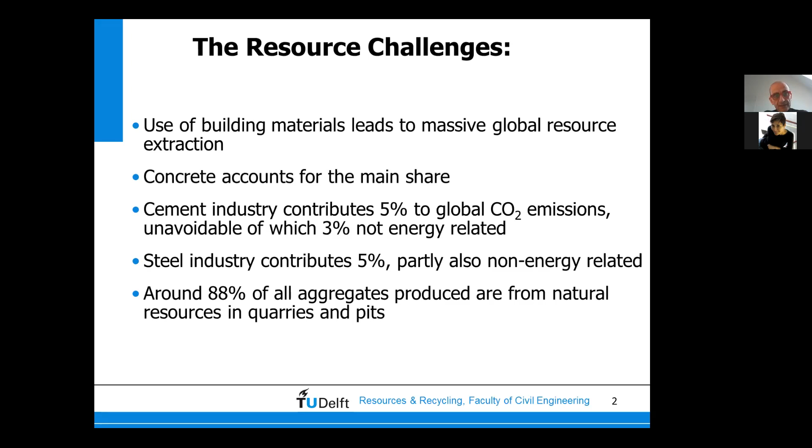Construction demolition waste is increasing exponentially because buildings are reaching the end of life, then are being demolished, and we have a lot of materials which we need to deal with in one way or another.

Land filling is not an option anymore. In many countries it's simply not an option, and as mentioned below, if all the demolition waste produced in Europe were landfilled, it would occupy an area of 75% of Dutch land. Even though the Netherlands is not a huge country, 75% is quite a lot.

Another motivation is that the European Commission set a very ambitious target on the recycling of construction material. By 2020, 70% by weight should be recycled, and indeed it is being done.

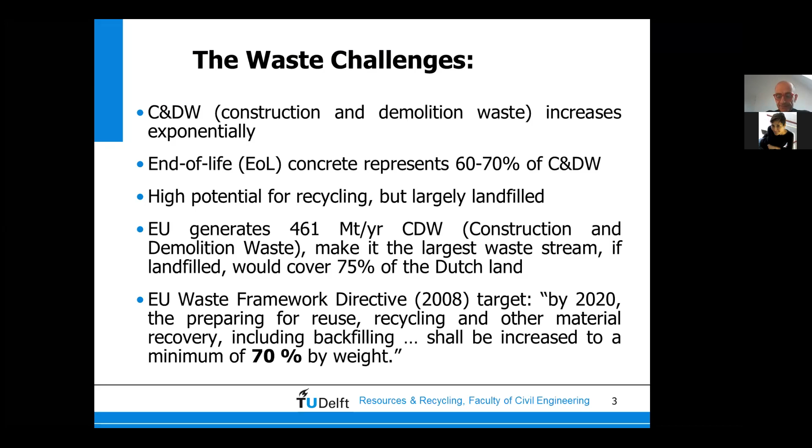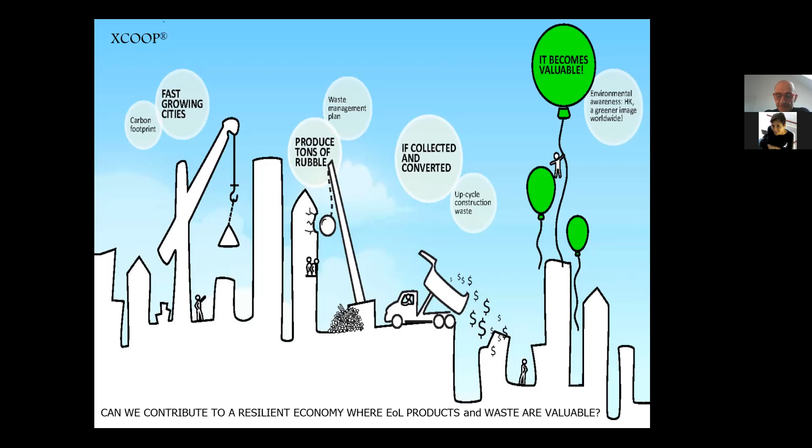Now these slides, made by Cristina, help me show you that in the city there is a lot of material which can be valorized and used to make new buildings instead of downcycling or even worse, landfilling. So it is possible to replace the current linear take-make-dispose industrial model with a more profitable and environmentally friendly circular economy one.

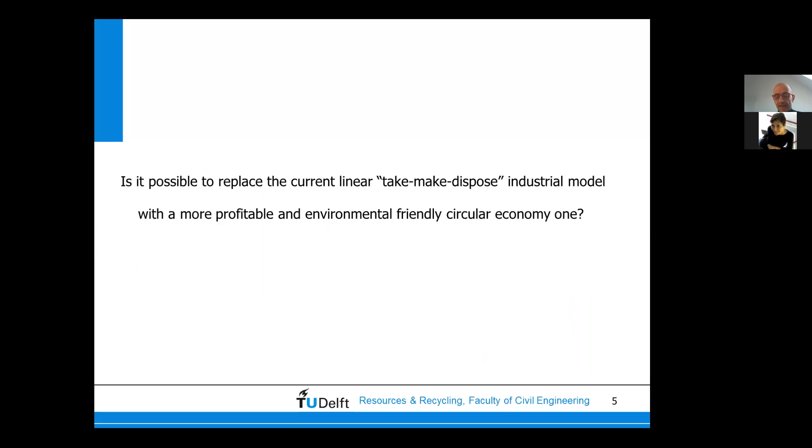The answer to this question, in my opinion, is yes, it is possible, and there are ways to do that. To help explain this in more detail, I will focus on an example.

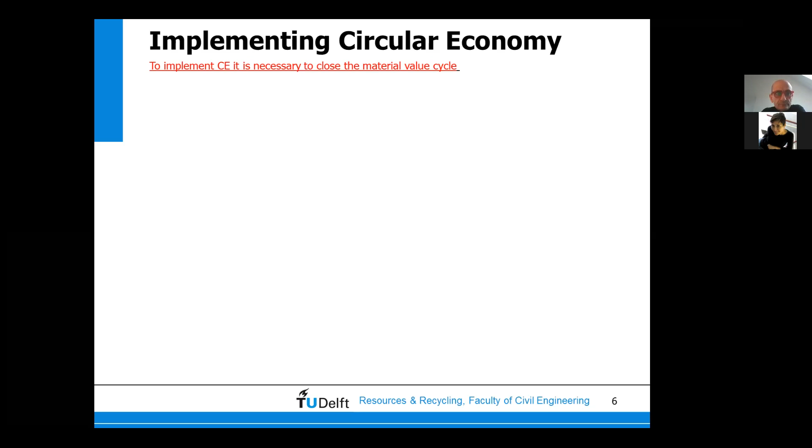I would like you to focus on a cubic meter of material moving in the truck that is delivering the concrete. This cubic meter contains a value of about 90 euro. By the way, one cubic meter of concrete is about 2.5 tons of material.

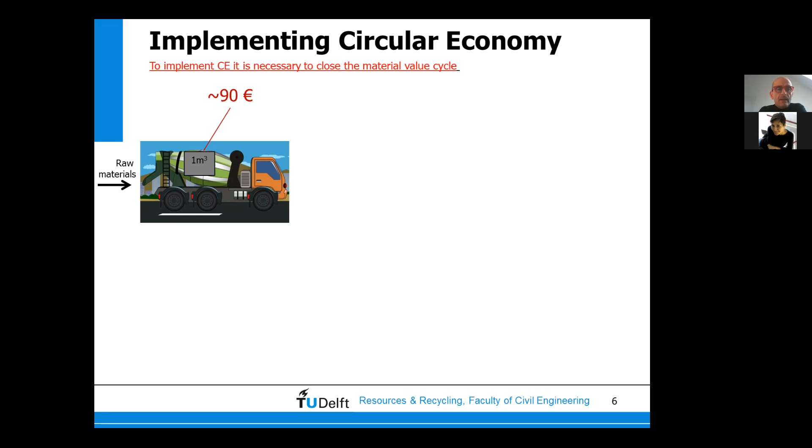So this cubic meter of material, when it is embedded in the building, we can assume it is still worth 90 euro, even though the value would actually be higher because it is part of the building. But let's keep it at 90 euro.

When the building is demolished, what is the value of this material, of this cubic meter? Normally it is between 12 and 15 euro, because it contains not only the crushed concrete but also pollutants like bricks, glass, gypsum, and so on.

Sometimes it even contains asbestos, and in this case the value is very much negative, not even 12 or 15, but much more negative, because asbestos is a very dangerous material.

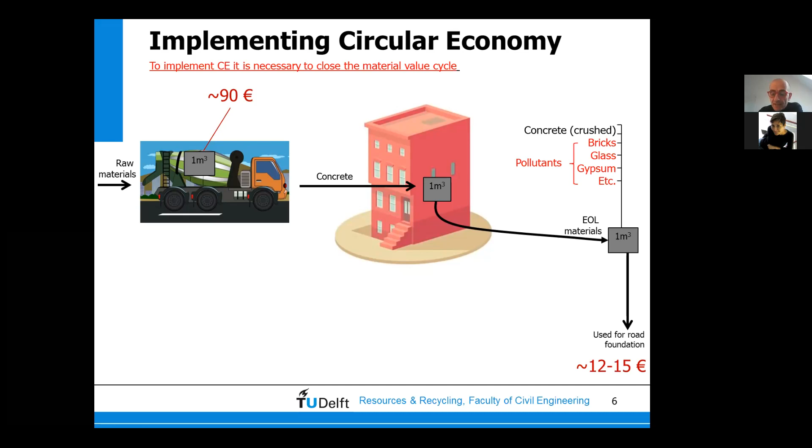Even though the value goes from 90 down to 12 or 15 euro, this material is still recycled because it's used most of the time as road-base material to make new roads. But as you can see, even graphically, this is not a circular process, because you go from material worth 90 euro to material worth 12-15 euro. This means you still need to dig and produce new aggregates to make new concrete. So it is not circular.

What do you need to do to make it circular? You need technologies, for sure - the technology to separate the bricks, glass, and gypsum from the crushed concrete and make it pure concrete again. Technology is definitely a must, but it is not enough at all.

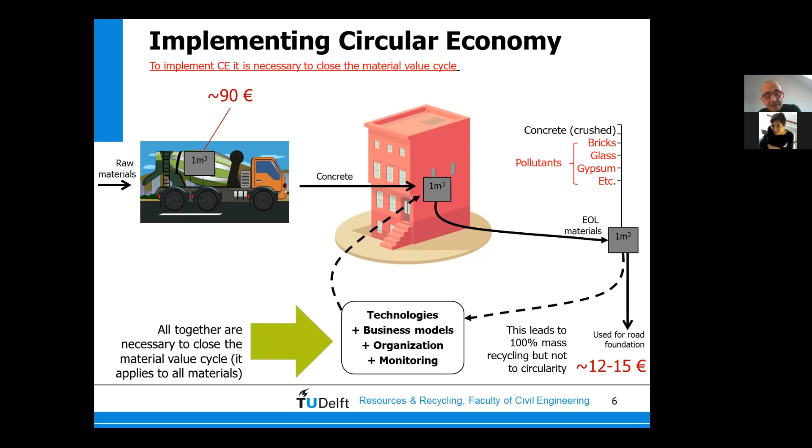You also need new business models, organization, and monitoring - we will get to this. All of these are key points to make that cubic meter of material, worth 12-15 euro when crushed, go back to 90 euro.

So the technology must be cheap, because the value anyway is not very high - you cannot spend 50 euro to get material worth 20 euro per ton, or even less. So it must be cheap, and if the process must be cheap, it means the technologies must be very clever.

There should be no residues, because again landfilling is not an option - otherwise it would make the whole economic process negative and it would not be implemented by industry. And the quality of the materials has to be good, because constructors are not going to jeopardize their project by using materials that can affect the structure of their building, for which they are responsible, putting their company into trouble.

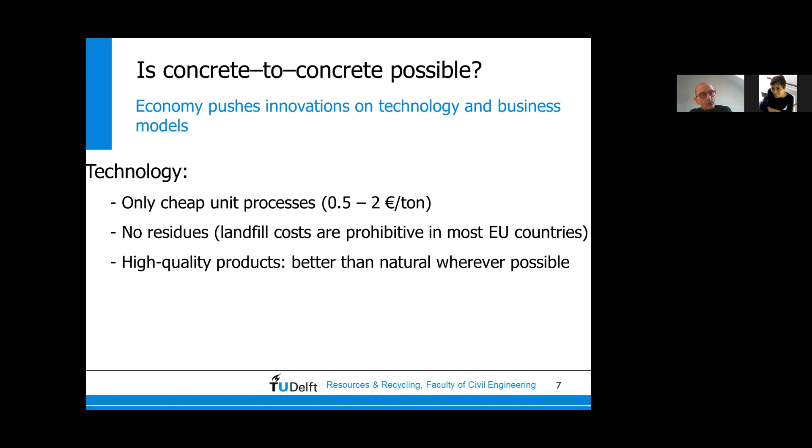So the quality must be high in order to make a high quality product.

Business model is also very important, because again the target here is to reduce cost and increase trust. One solution is to avoid and minimize transfer of ownership, to avoid materials going from one actor to another, with each actor wanting to gain profit, because eventually the full process is not economically profitable.

Then we need to avoid transport for economic reasons but also for environmental reasons. And then we need to create transparency about quality. People must know what they are buying, because if they are not clear about what they are buying, they don't buy it. And if they don't buy it, there is no demand, and if there is no demand, the value of recycled materials is almost zero. And then again, you don't close the loop.

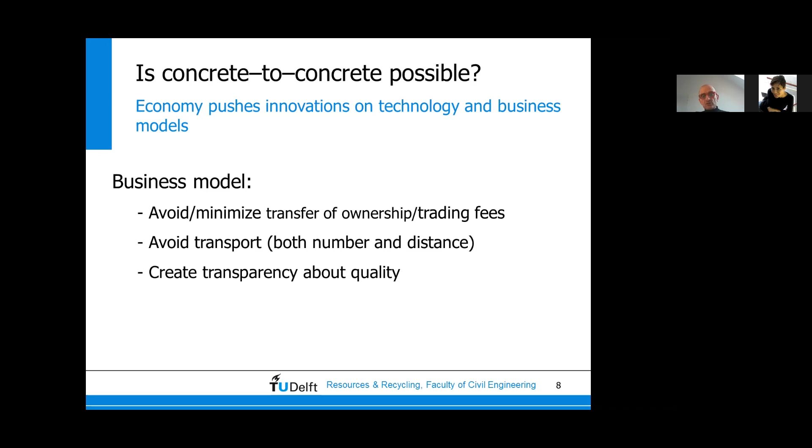And then we don't need to dig new raw materials, virgin materials, to build new buildings, construction, infrastructure, and so on. So this is in a nutshell what we are doing, what we have been doing, and what we will do in the future to make this happen.

From the end-of-life buildings, we go to smart dismantling, which means we deconstruct the building in a smart way. I will show you later how it is done. Then we have selective demolition to get only the concrete, as clean as possible. This clean concrete is then crushed in a crusher. Normally this is nothing special, it's a state-of-the-art technology.

And then, if necessary, we have sensor-based sorting to remove big pollutants from the crushed concrete. Then we go to ADR, which stands for Advanced Dry Recovery, a patented technology developed in our group, the group of Resources and Recycling, which can produce clean aggregate 4-16 millimeter aggregate, very clean and usable to make new concrete, but also 0-4 millimeter sand, which goes to another technology, also patented by our group, which produces minerals and recycled sand, clean sand.

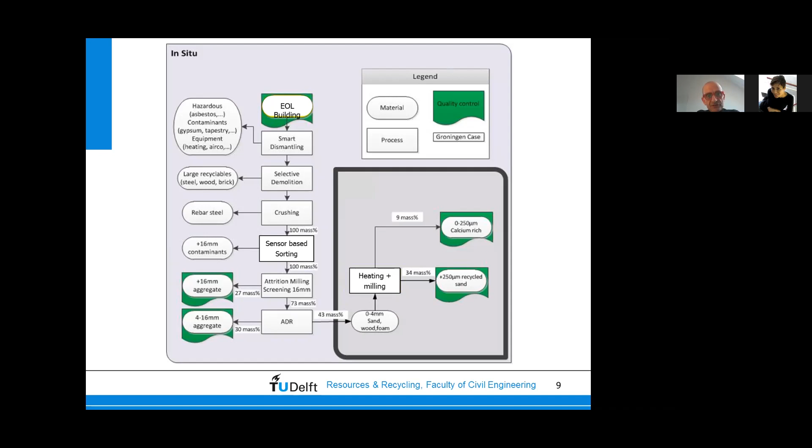So now I will show you some pictures, because pictures are much better than such a graph. And here you can see how to do the smart demolition, or selective demolition, it's the same. This was actually a project done in Groningen a few years ago, but we have been doing this also later on. I like this photo, that's why I'm using it.

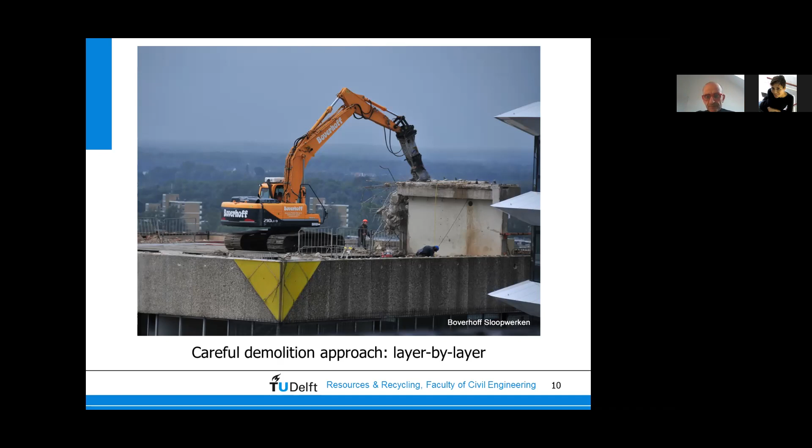Then you get all the concrete from the building. It was a tower of 40 stories. For the Netherlands, for Europe, it's a high building. Probably for the US it's not that tall, but still here it's tall.

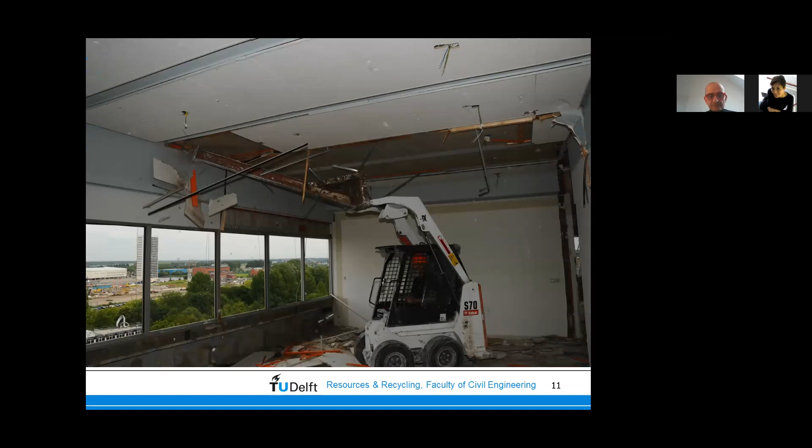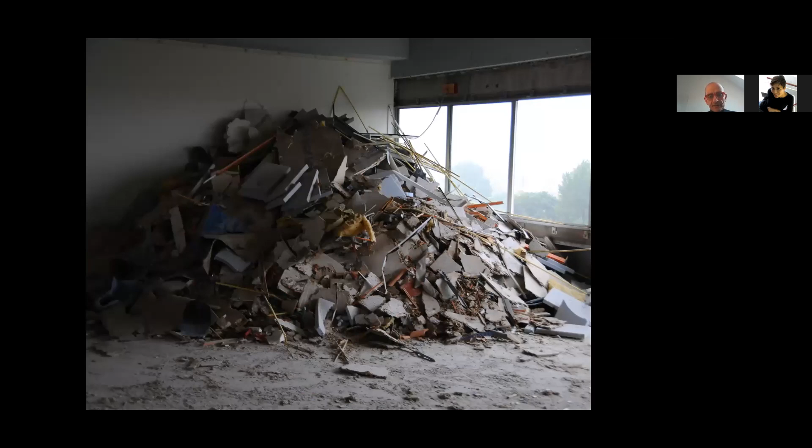And then you see a bobcat inside the building to remove the gypsum, the metals, the carpet, the steel. You also see a guy dismantling the hydronics of the building to separate valuable materials like copper and so on. And also you get valuable materials, but also eventually clean concrete to be crushed. And here you see the carpet being collected and selectively placed in different containers.

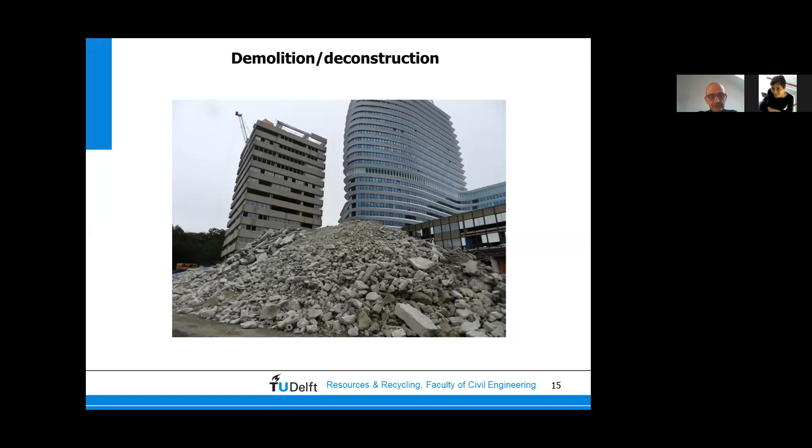So then we go from the building you see on the left to the building you see on the right. And the material to use is the heap you see in the front of this picture. This is exactly the crushed concrete we use as input for our technology, which we call C2CA technology, which stands for Concrete to Cement and Aggregates.

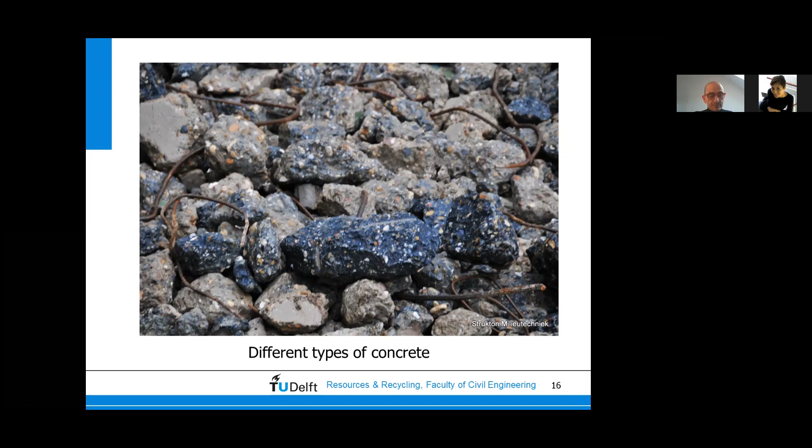I'm also proud to mention that we set up a spin-off company of the Technical University Delft, named exactly C2CA Technology. And this technology has been getting quite some interest from international organizations, because they found it to be a very important, useful technology to make construction circular.

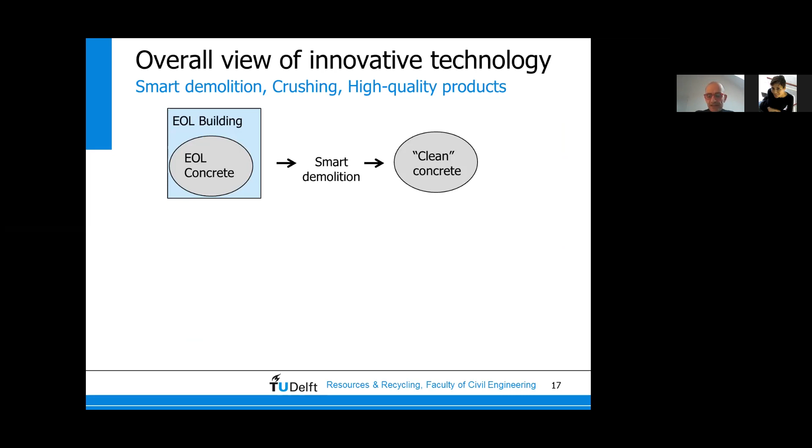So then we go from the end-of-life building, concentrating on the end-of-life concrete. With the smart demolition, we get clean concrete. From the clean concrete, with the crushing, we get the contaminants, the steel rebar, and the crushed mineral. Then by using the C2CA technology, we obtain aggregate measuring bigger than 16 millimeters, the 4-16 aggregate, the 0-4 sand, and the cement paste. And this is used to make new concrete, and then we make it circular.

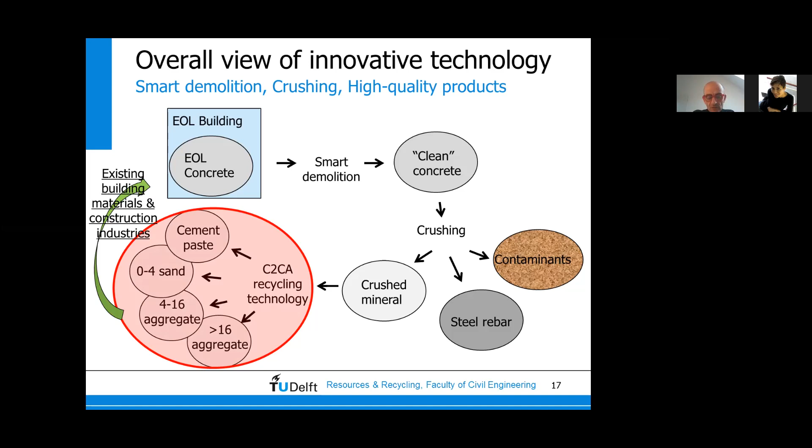This is the working principle of the advanced dry recovery technology. Here you see the input: it is crushed 0-16 millimeter crushed concrete, which comes from the crushing of end-of-life concrete. It is sieved, and we get the 0-16 millimeter fraction, which is fed into the ADR.

The ADR is basically an advanced sieving machine with the very interesting capability of sieving materials which are wet. Since during a demolition project you always spray water to reduce dust, and also because in the Netherlands it rains quite often, you anyway get wet material. You cannot sieve wet materials with a conventional sieve because the sieve gets clogged and stops working.

The ADR makes a very fast jet, creating a jet of materials. It accelerates the materials at about 3000 G. By doing this, with cleverly placed compartments, the machine separates the heavy particles from the small particles. It's basically like when you go to the sea, get a handful of sand, and throw it against the wind - you see that the heaviest particles fall farther than the fine particles.

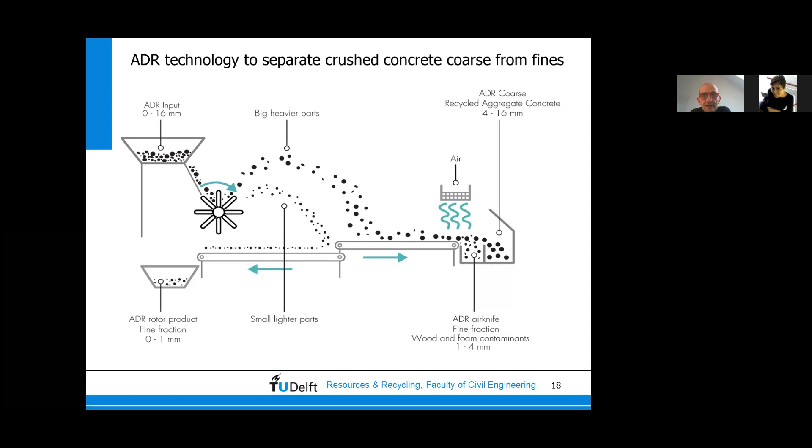Now I would like to show that this technology is not just theoretical, but is really implemented at industrial scale. We even made it movable, because we wanted the possibility, whenever possible, to bring the recycling facility to the demolition site instead of bringing the materials to the recycling site. The ADR is movable.

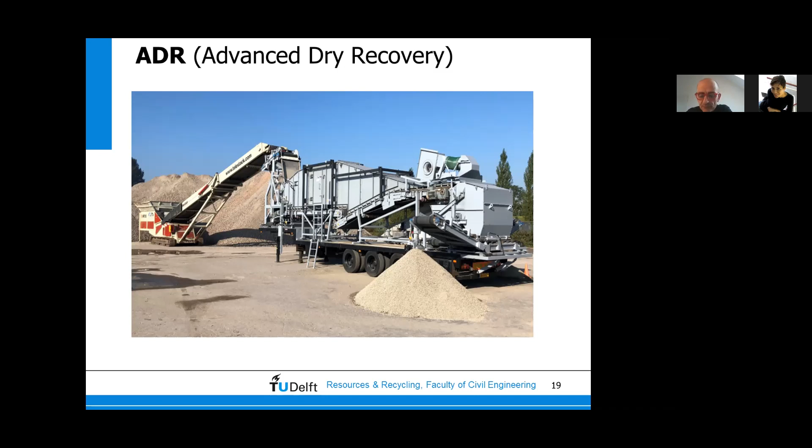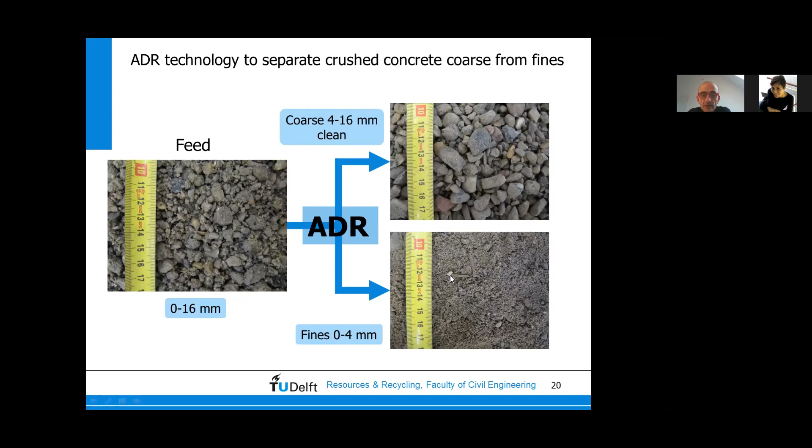So this is still the ADR. Now I will show you the heating air classification system used to treat the 0-4 millimeter fraction. This is the working principle of this machine - it is a kind of fluidized bed reactor, but not exactly, it's similar.

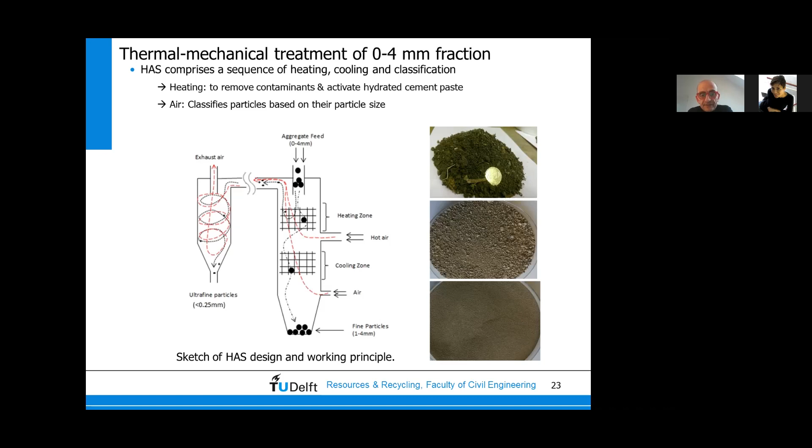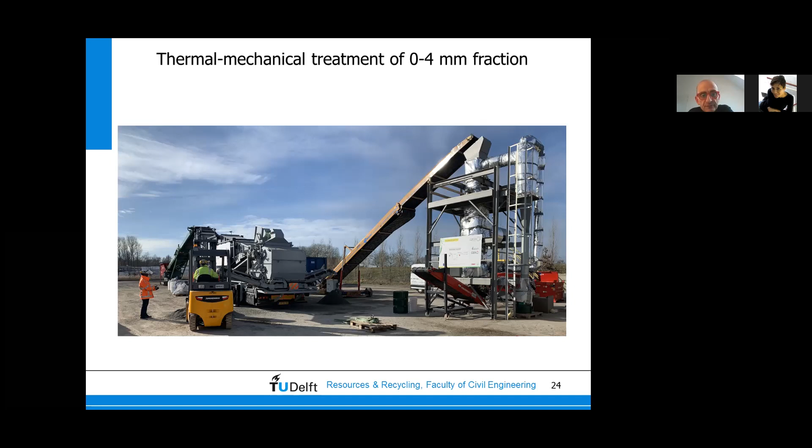This HAS machine is also movable. This picture shows one demonstration we have done - actually we are doing many of these. Here you see the ADR and the HAS working together, processing materials.

But there are also other uses. I cannot go into too much detail because my time is limited - otherwise Cristina gets nervous with me.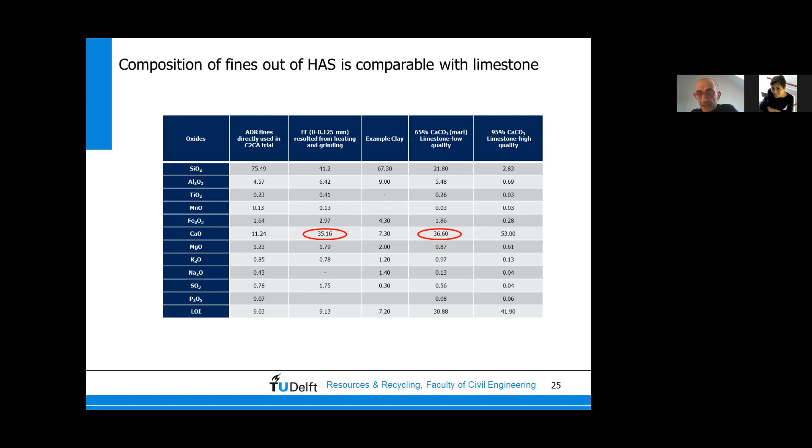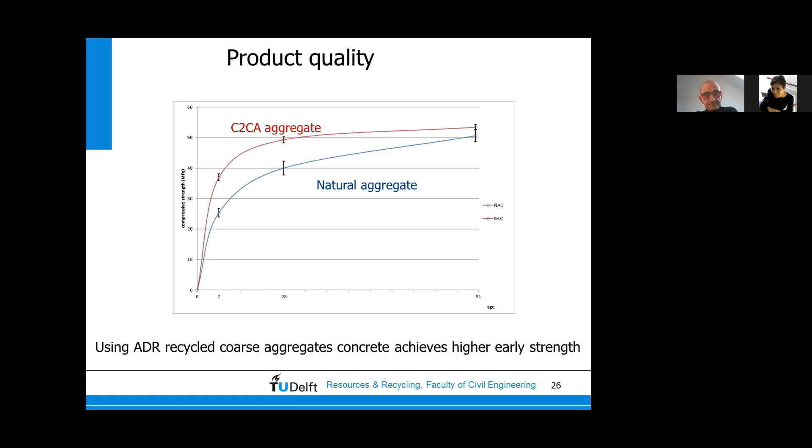Another important aspect I mentioned before is monitoring, and this is a very important aspect we are focusing on right now, because we want to make people confident of the materials they are buying. To do this, we need to assess the quality of the materials, not by sending the material to the lab, because then you have to wait days to get the analysis back, and this is not possible.

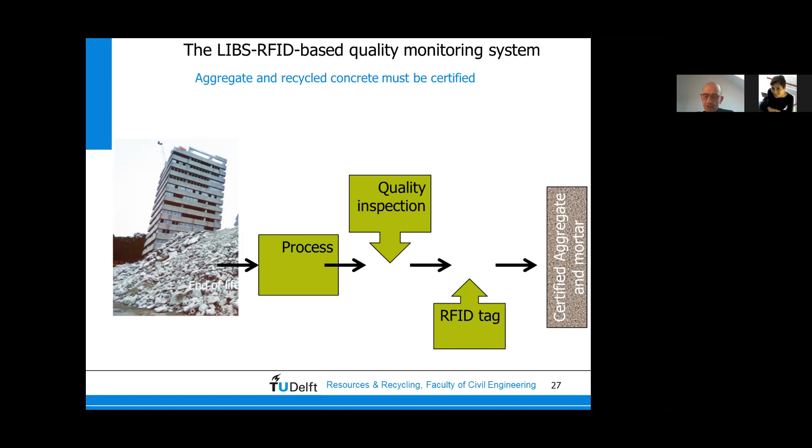We need to have an assessment of the quality of the materials right away, in the moment we are processing the material. To do this, we are using laser-induced breakdown spectroscopy along with RFID tags, which will make all the steps in the value chain more clear. This is the LIBS. How does the LIBS system work?

The laser produces a plasma when it hits the materials, and when the plasma cools down, you get the spectral response of the materials. I mean, when the laser produces a flame, and the flame then cools, it emits photons which are collected by the spectrometer. By the analysis of the spectra, we can get an idea of the composition and the pollutants, if any, moving on the conveyor belt.

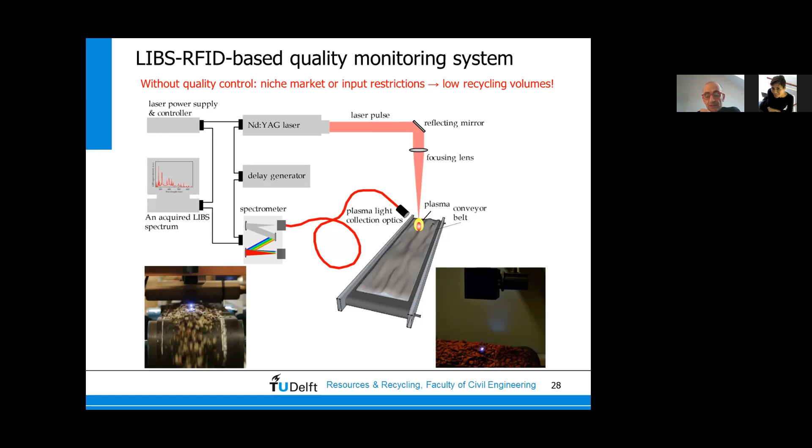Now we are transferring this information into a tracer, an RFID tracer, and conveying this information into the materials going to the market. Then the material is not only of high quality, but the quality is assessed by the LIBS, and this information is transferred through the RFID to the customer, who will be able to check whether the material they bought is the one they were waiting for.

This is a very important step, because it will reduce, in my opinion, the main bottleneck which prevents the use of recycled materials, which is the lack of trust. In this way, we can increase the trust, and then we are confident that this will make a difference.

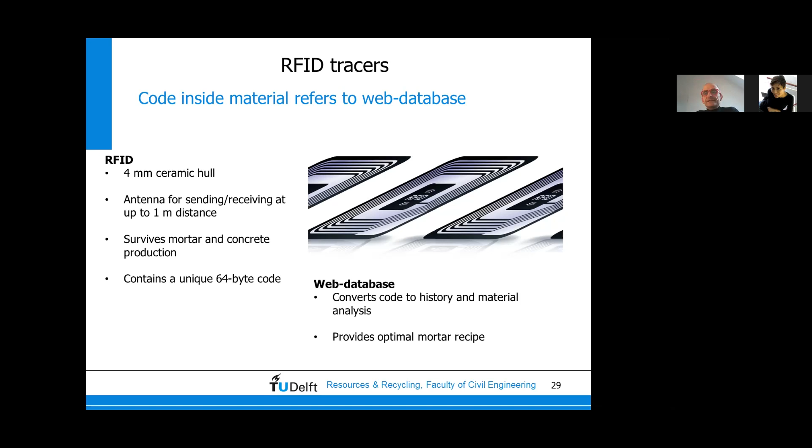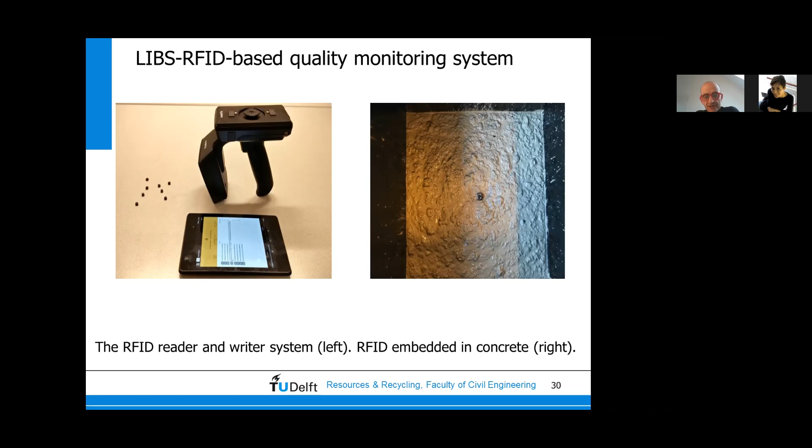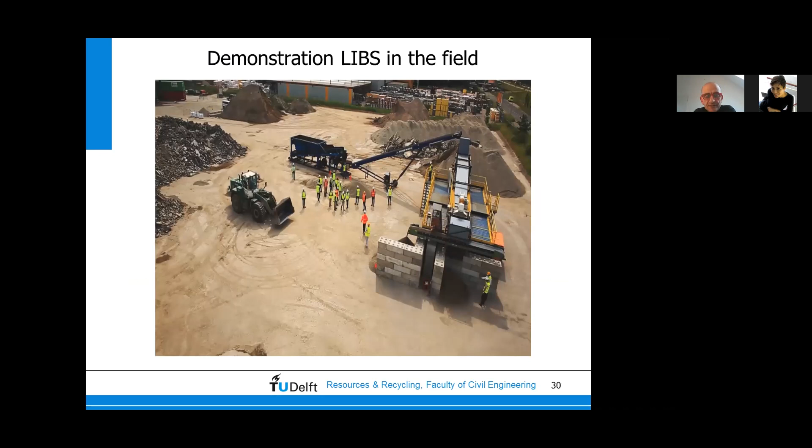Here you see the RFID reader and writer. We have made a lot of tests. On the right side you see an RFID tag in blocks of concrete. We have checked the durability and readability throughout this process. I cannot show all these results, but I wanted to say that we also made a demonstration in the field.

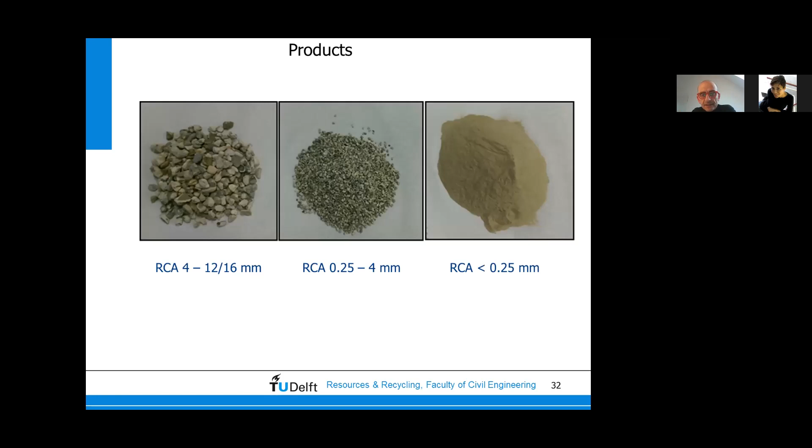Here you can see a picture of the materials we are producing, and as you can see, the material is quite clean and has high quality. Not only is it clean and high quality, but this quality information can be transferred in the following step, which can increase the marketability of this material.

Now I would like to tell you what are the economic drivers which make this technology, and this spin-off company, interesting. It's actually similar to what I said before, but tailored more for the company. The aggregate sector is the largest among the non-energy extractive industries.

The European aggregate demand is quite big, 2.7 billion tons per year, representing a large amount of turnover. The global construction aggregate market is growing quite fast; in the US it was 350 billion and will reach 560 billion by 2024, growing at 6.1%. This is a forecast, but it shows there is also market potential for the company in this sector.

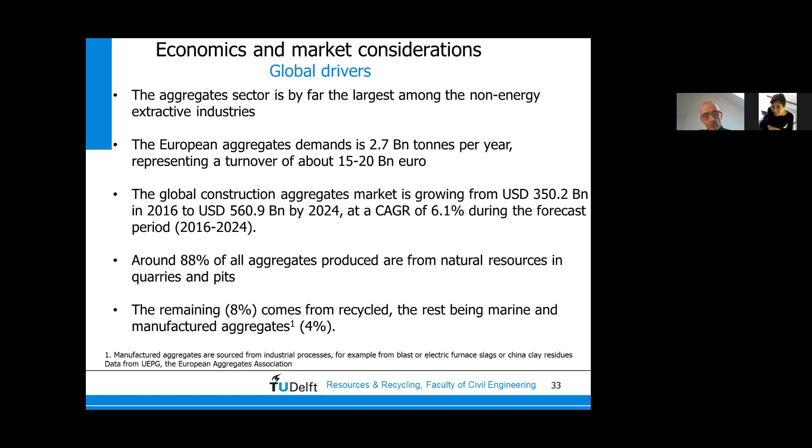Again, 88% of aggregate producers use natural resources, which is also an environmental motivation. The remaining share comes from recycling, only about 8%... which means there is a very big potential for the recycling industry to produce high quality material, and for companies that are also able to transfer information about that high quality material.

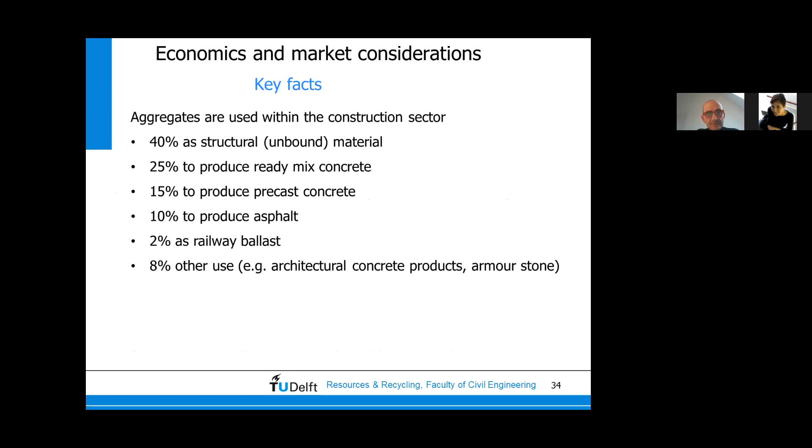Okay, I'll go a little faster because otherwise time will be a problem. I want to mention some raw data about the plant, for this machine, for an industrial machine. You see the operational cost is not very high, which means there is real potential to make business, to make money out of this. As many Dutch people say, let the market do the job, and this is really the way to implement circularity. It has to be market driven.

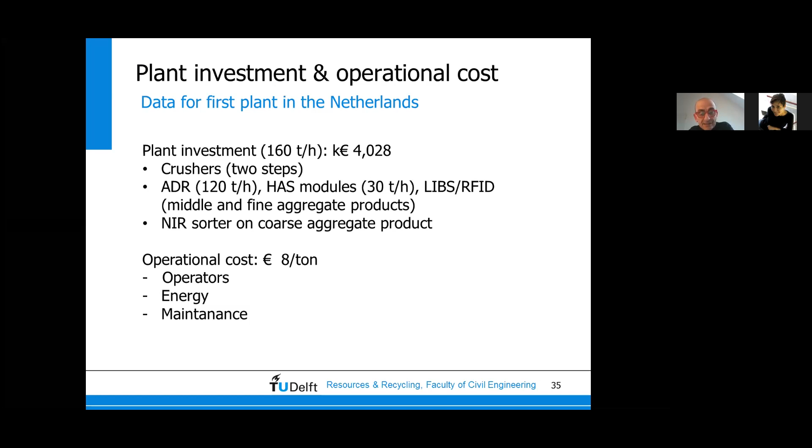I would like to show these slides because they make me happy. I was happy when I made this calculation because I can see that we can indeed make the end of life of concrete circular. On the top table, you see the composition of 1 ton of concrete, what is the value per ton, and what is the value in 1 ton of the concrete. In 1 ton, not 1 cubic meter. What I talked about before was a cubic meter, now it is 1 ton. And then you see that the value is about 20 euro.

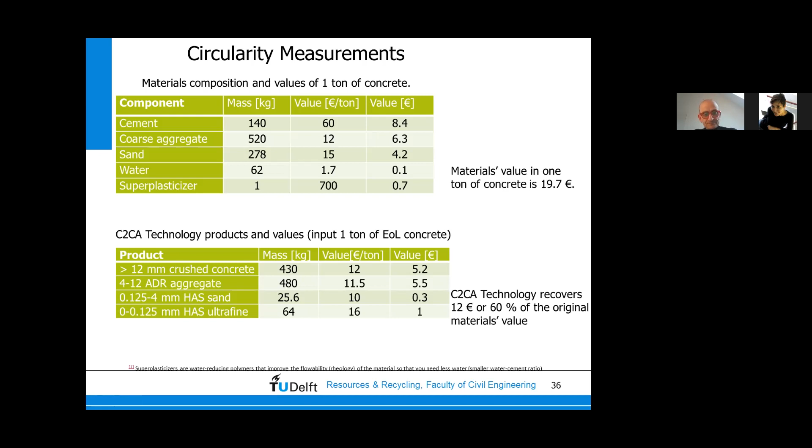On the bottom table, you see what C2CA technology can do, to what extent it can make this circular. We can recover 12 euro of this 20 euro, which means our technology is 60% circular, we can say. And this is already quite a big achievement.

From the environmental issue, I want to emphasize that by reusing recycled cement, we are saving the CO2 which is released when you feed limestone into a kiln for cement production. To make cement, you need limestone. When you put limestone in the kiln, it is decarbonized, and CO2 is produced not just because of energy consumption, but because of the chemistry of the reaction going from CaCO3 to CaO, which is what cement needs, and the CO2 is released. It's not possible to avoid this. But if we feed the kiln with CaO instead, this CO2 is saved. This means we have quite a positive potential effect on the environment.

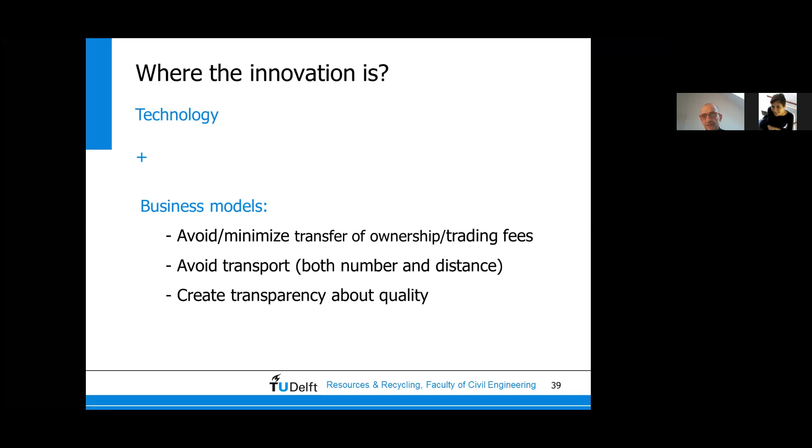It cannot be just 'I buy.' What is the quality of the material? It's low quality, okay, but you cannot just give a price to these materials without knowing that, and then there is no market, there is no demand. Again, there is no possibility to make construction circular.

Thank you very much, this was my last slide, and I'm very happy if you have a question, or discussion, or opinion to share with me, please.

Thank you very much, Francesco. Thank you, Cristina. It has changed since last time I listened to it. Wait, I think it has changed in meaning, the world is being more open. There is a question, Hélène, do you want me to read it or do you want to state it yourself?

I'm really impressed how well this can work for a large building where the percentage of concrete is pretty high, but how does it work when you get smaller units or row homes where there's much more brick and wood? Can you do something there?

No. When there is bricks or other materials, as I said, concrete accounts for 60% of the construction demolition waste. If we're even able to deal with 60% of the construction demolition waste, we already would make a big difference. In the US, I found a report from the Environmental Protection Agency which says concrete accounts for 60-80% of construction demolition waste.

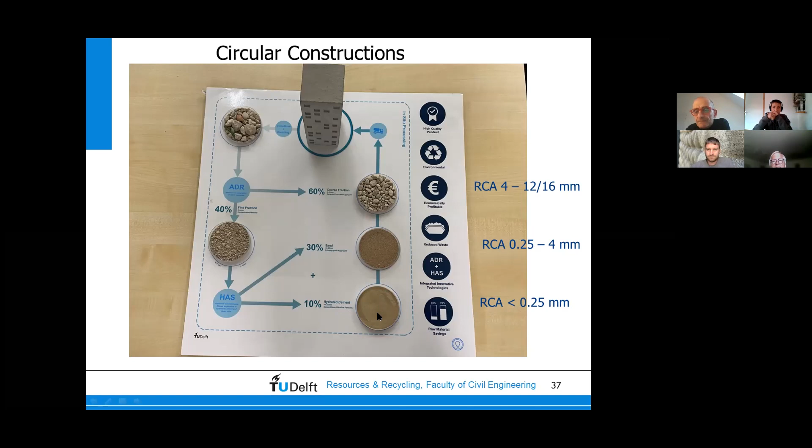10% is hydrated cement. These materials can be used as raw materials for the kiln. If you feed one ton of this material into the kiln, it will not emit this CO2. Basically, you save about 50% of the CO2 emitted to produce one ton of cement, because roughly, to make one ton of cement, you emit one ton of CO2 because of the energy, and one ton of CO2 because of the chemistry.

The ton of CO2 connected to the energy, you still have it—it's still there. But the ton of CO2 related to the chemistry is not there.

That answers the question, because in the beginning of your presentation you showed how much global CO2 emission comes from concrete production, so that gives us a sense of how much reduction that will be—about half. We cannot produce all raw materials for the...

So you're essentially proposing to refire existing cement. Yeah, it's a raw material—it contains CaO, and it can be used to make the raw meal in the kiln. Gotcha. And does that affect the overall strength of the material once it's used in construction?

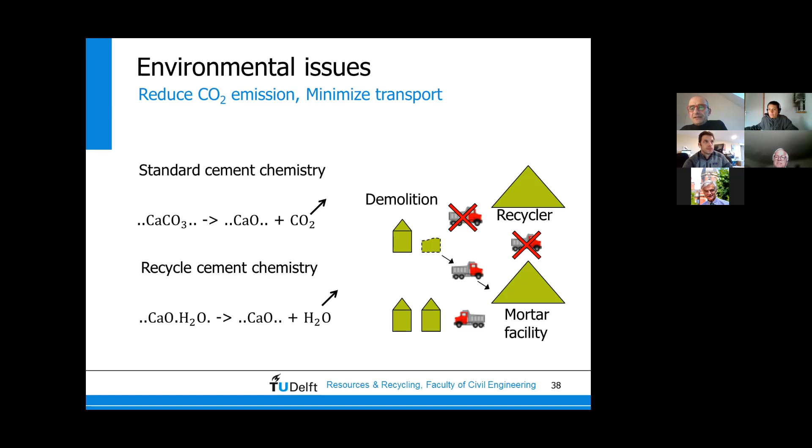Basically, you don't have much other way to do it. For steel, as I said, it's being recycled, no problem. What comes next? You have wood, but wood is also a minor component at the global scale. And even when it's burned, you still need the energy, and it is a biofuel, so it's reasonable to use it as fuel. Then the main component is concrete, and once we're able to make concrete circular - concrete is the main construction material.

Actually, no, it is sand. Sand and aggregate are the most used materials worldwide after water, which means it's really a huge amount. Many countries are now facing trouble with sand. We feel that sand is nothing special - oh, it's just sand - but sand is a precious material, and there isn't so much sand left. Many people think, oh, there's a desert, you can use that sand, but desert sand cannot be used for construction - it's impossible, it doesn't have the correct particle size distribution. There are countries fighting over sand. Honestly, I didn't know this until I read two scientific articles recently - there are really countries fighting for sand. There are environmental reasons too, because in some countries they're digging up mountains to get rocks and crush them to make aggregate and sand. It's not environmentally friendly for many reasons.

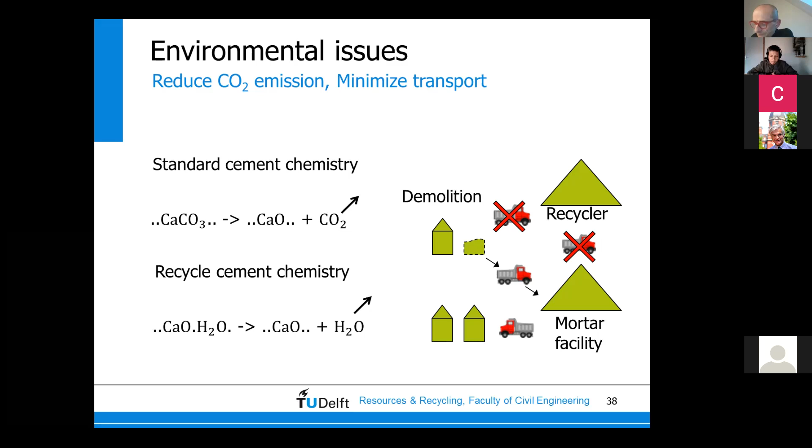Hi, thank you Dr. Francesco for the talk, it was very knowledgeable. But I just want to ask you, regarding the ratio of demolition of a building and new construction going on, is there a system in place where the two industries connect with each other, like a demolition industry and a new construction industry, so they can talk to each other? Like if demolition is happening, new construction can come and talk with them, and they can figure out what materials they could use from the building. Is there a system set up like that where two industries can talk to each other?

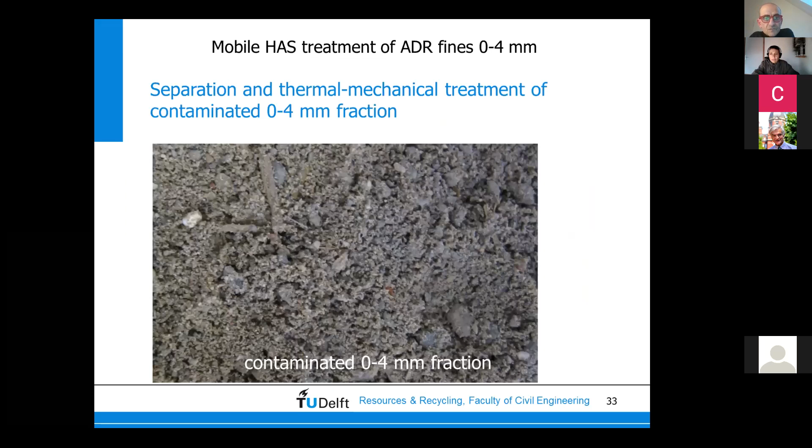So there's no need of a middleman mechanism? Yeah, that's why I said the business model should also be innovative.

What we are doing here is we think a good solution is to make the company that does demolition a partner of the company building the new construction. The best would be that they are the same company, because then the company who demolishes the buildings will take more attention in selective demolition. They will make more effort in not polluting the concrete, and then if you have cleaner concrete, you produce cleaner aggregate, and you can make better concrete again from the recycled aggregate, making a better system overall.

If this is not possible, then we wanted to create transparency about the quality by using LIBS and tags, to avoid people along the value chain being reluctant to use recycled aggregate because they don't know the quality of the materials they are buying. One solution, of course, is to avoid many transfers of ownership.

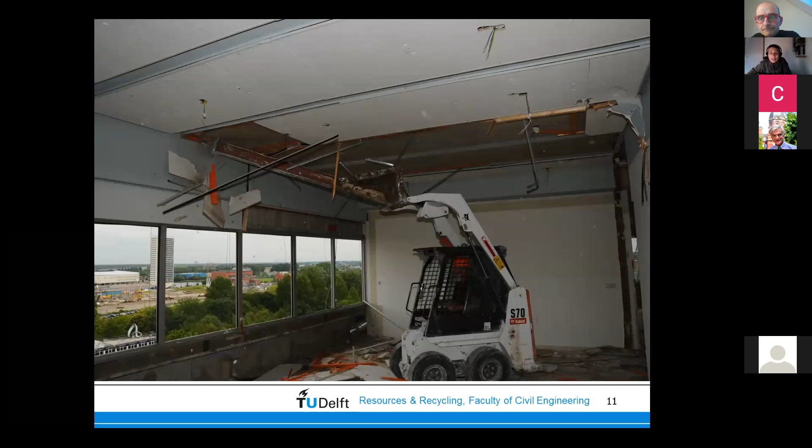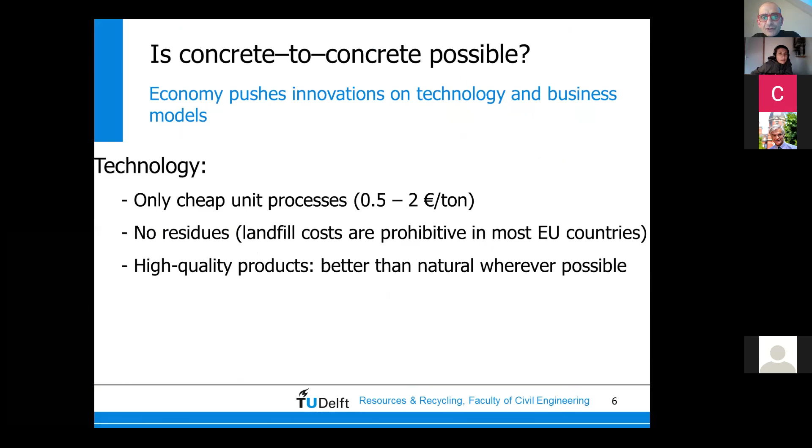I think during your conversation you said our economy is 20% circular already - did you say 20% or 80%? No, I don't think I said that. Where did I say this? I thought I heard that our economy is already 20% circular. So, no, I probably said no, in this table here.

Here. Yes, exactly. What did you say?

Here I said that our technology can extract 60% of the value embedded in 1 ton of concrete. I'm talking about our C2C technology, made by the ADR plus the HAS plus the LIBS-RFID system. It can extract 60% of the original value of the concrete, which means our technology can make it 60% circular.

Exactly, so very profitable. Can you tell us a little bit about the time implication to do this? How long does it take to conduct a circular cycle?

It really takes very little time, it can be done in a matter of hours. Once we have the crushed concrete, we process it with the ADR at 100 tons per hour. Then the HAS processes the fines. There's the building, we crush the buildings and get the crushed concrete. From the crushed concrete it goes to the ADR, and 60% is already cleaned to make new concrete.

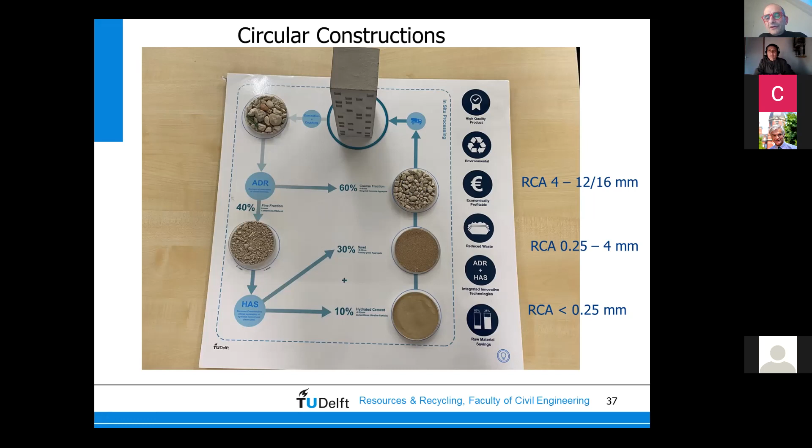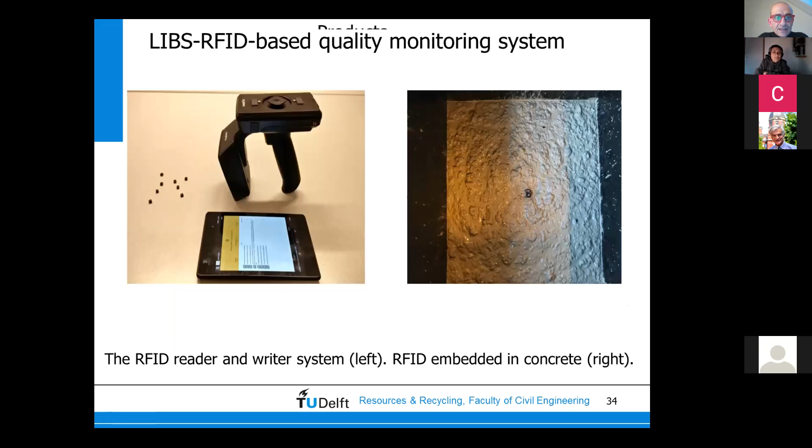One of the advantages of recycled aggregates is that they set faster than virgin aggregates. It's not certain, but probably because the recycled aggregates have already been in contact with cement in the past, so the surface is more reactive than the virgin one, and we found that it sets faster.

After 7 days, the compressive strength of recycled aggregate is higher than that of natural aggregate. Later it reaches the same, but for the precast concrete industry it's interesting because they would need less time to release, to make their plant and installation free for producing new components, so it has no economic enemies.

Even recycling all aggregates from demolition, we still need virgin aggregates, because the amount of building we are making is larger than the amount we are demolishing. So from this point of view everybody would be happy. The cement industry is happy because they make less emissions and pay less for the emissions they produce. The concrete people could even benefit from using faster setting material. I don't see a problem in this respect.